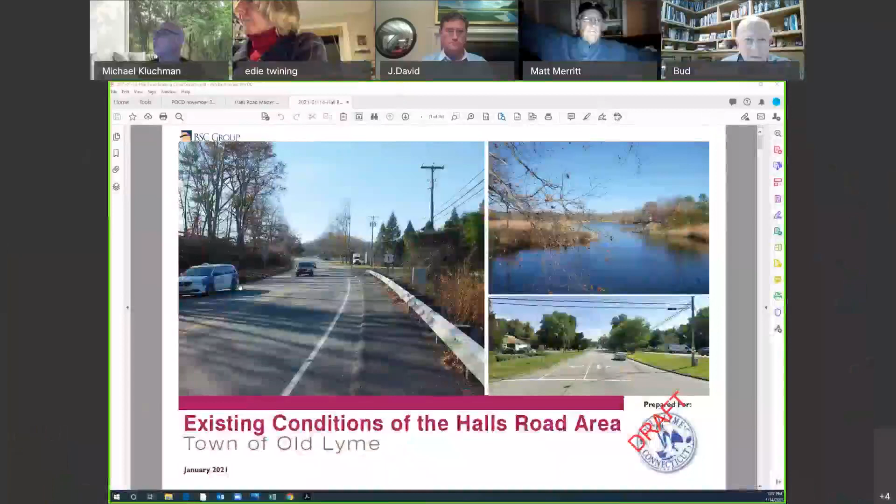Okay, thank you Edie. Let me try to share my screen here. Okay, so hopefully you're seeing three pictures of the corridor. Does everybody see a sort of cover page? Yep, okay great, thank you.

Just all of these platforms are different, so basically you disappeared, but I can see what I'm talking about, so that's good. Again, my name is Michael Kluchman, manager of landscape architecture for BSC Group and project manager for the Halls Road Master Plan. As Edie said, we're basically done with our first phase, which was basically an existing conditions analysis, including a market study.

We're wrapping up a draft on this right now. We still have some edits to make and some feedback for me, but we're close to being done with this deliverable. This will be wrapped into a final report section, but I want to run through this. Some of the stuff will be similar to the last presentation. If anybody has a question, please stop me, and we might want to review some of the things. But let me just run through some material here.

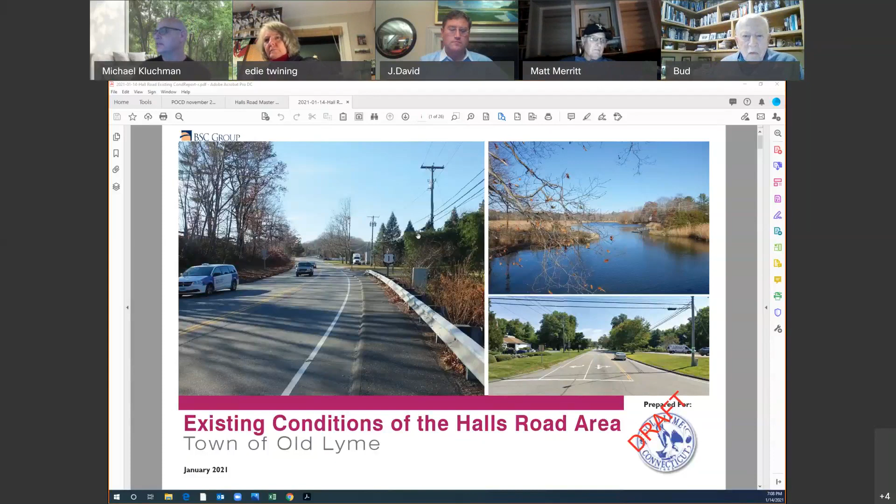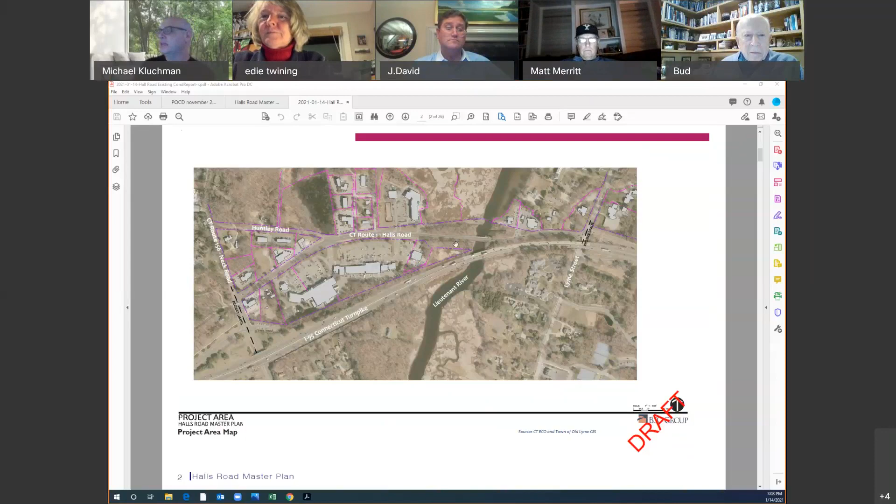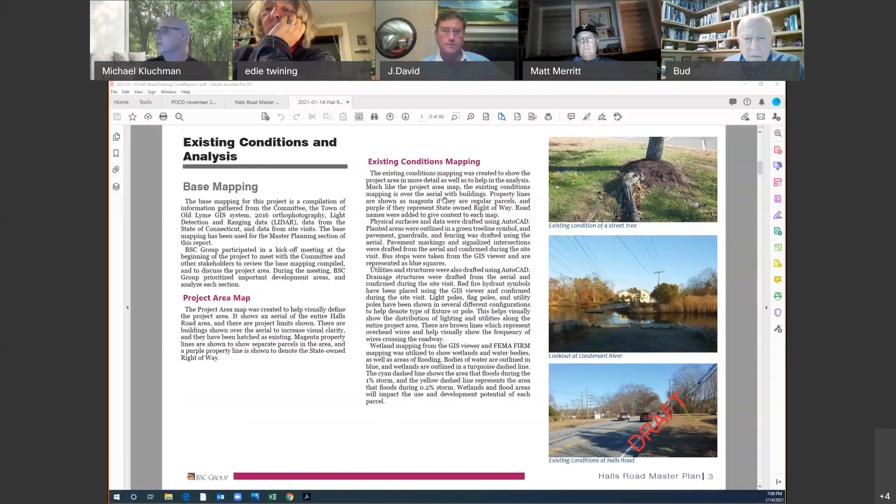So what we have here is our project area from 156 Neck Road over to Lyme Street, along Halls Road, and this is our overall context map that we did as part of our analysis. This is base mapping of conditions, which came from available GIS and state data overlaid with our own field reconnaissance, work and drafting. So there's a lot of information on these plans. We've broken down the corridor into sections as far as the report goes.

Again, when this report is published, you'll be able to read the legend, but I can explain if anybody has questions about what's on here. So we have the private property lines, the state right of way, existing vegetation, the highway elements, guardrails, street lights, utility poles, and things like that.

As we go down, you'll see that where there's wetlands or flood lines, those are also on the plans. We've identified light poles and traffic signals, utilities, fire hydrants, et cetera.

This plan is overlaid with an aerial image, which is also available from the state, geo-referenced to some of the line work and the elevations. We've also pulled out elevational information available from the state, but we've shown that where it's relevant with slopes and other things, so as not to cloud these things too graphically. What I was getting at is that the aerial imagery and the line work is actually fairly accurate for planning purposes, which is why we use this as a base map.

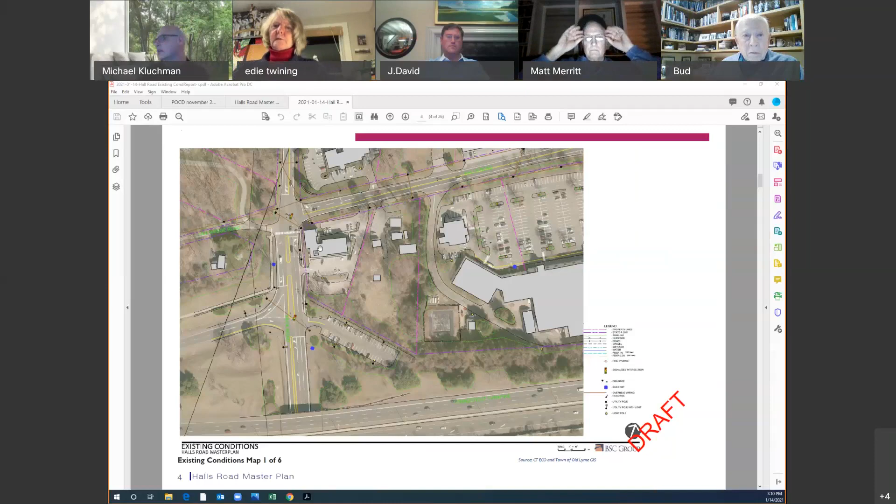So anyway, we're starting at the western end, and we have two windows, one to the south near 95, and then one up picking up Huntley Road.

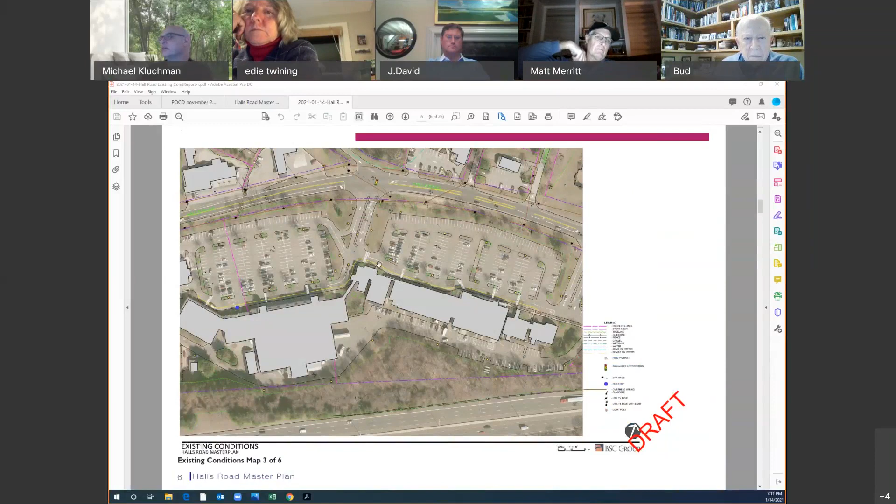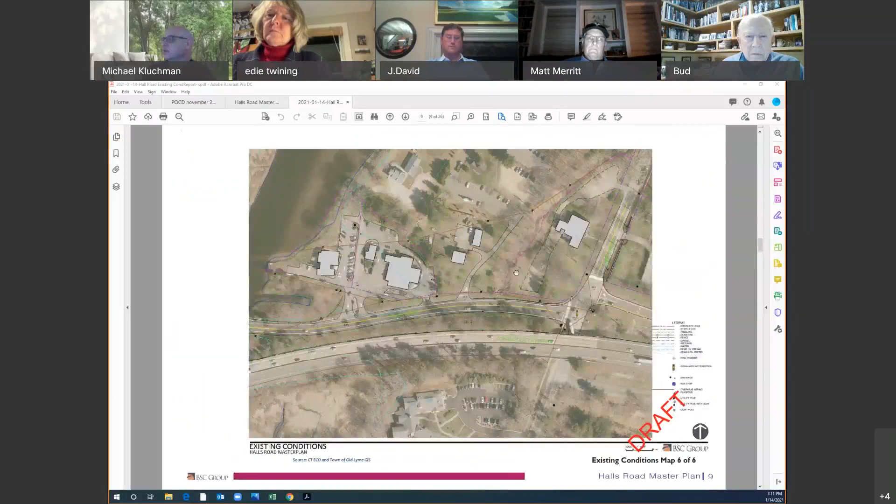We move down the corridor, we pick up the Big Y and shopping center parking lot, and continue down the corridor to where the Dunkin' Donuts is across the street, to the Lieutenant River crossing, where we're starting to see some of the 100 and 500 year flood lines. We can go into detail on this when we start doing our planning work, blowing up areas, since this is very useful information. Finally we get across the river to the Florence Griswold Museum and the art station building at the end of our project area.

Not to read through all the text, but as far as existing conditions, we talked about the public way, the town streets and state-owned highway right of way, and looked at pedestrian facilities within that, including the existing Chamber of Commerce safety walk. We looked at bicycle facilities, or lack thereof, and then focused on describing the roadways in the project, primarily Halls Road, which is Connecticut Route 1, and some background on what that means for the planning process and working with the state on improvements.

One question asked a while ago, and we're working with ConnDOT on a number of projects, one even in town, is whether the highway department will be an obstacle to achieving the goals we've set for a better connected, safer corridor with improvements along the roadway. The answer is no, but if you ask them for one particular thing, like a crosswalk, they do need to know the context.

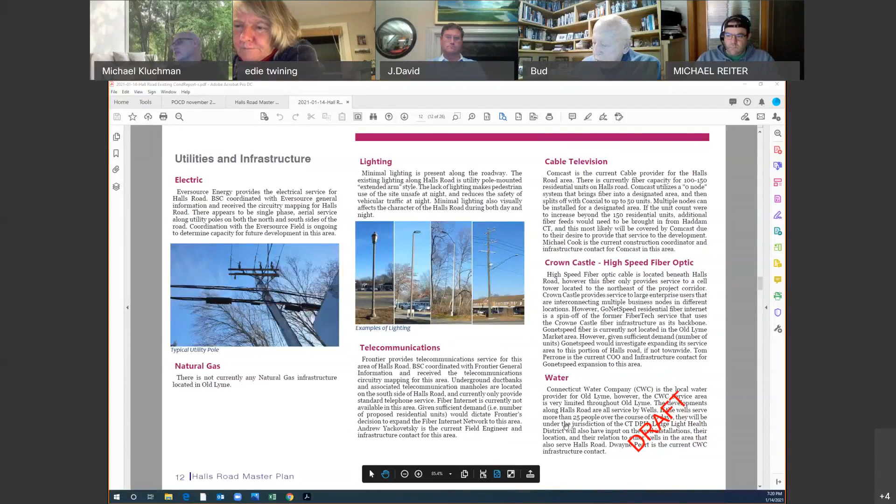Water, just saying the obvious, there's just well water in the area. If you're looking at expanding it, there are standards that are just sort of state tiers. So if a well serves more than 25 people over the course of, I believe, 60 days, they are under the jurisdiction of Connecticut Department of Public Health. So there's just another level of regulation, but it's no big deal - just be aware of that sort of thing, there's thresholds that change who regulates what.

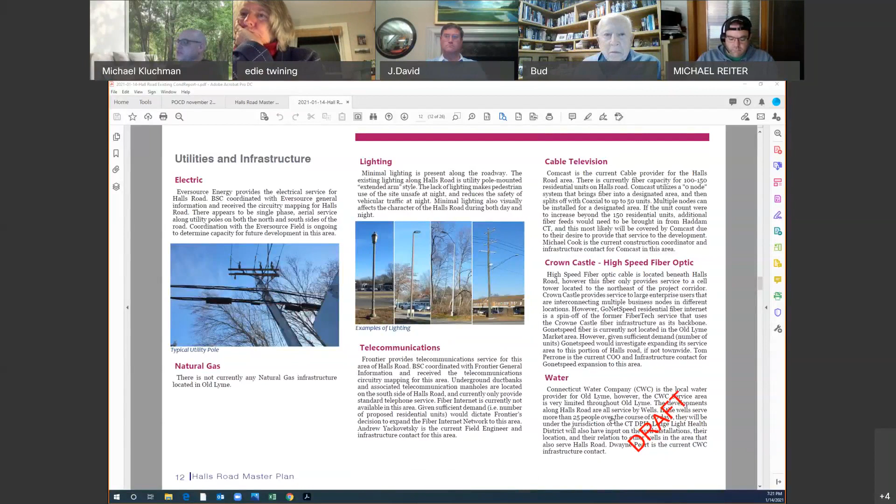The same goes for the sanitary sewer. So right now we know there's no sewer service along the corridor, and the Ledge Light Health District is the jurisdictional body which handles the installation of systems that generate 7,500 gallons or less wastewater per day. That's most likely what you have there. Right now, I think even including the system behind the big Y, it's not residential, so it's not actually that much production.

So our understanding is right now, all of the systems are under the jurisdictional body of Ledge Light. Once we look at possible development scenarios, once you go above that limit I talked about, you start getting into the Department of Environmental Protection, who starts getting their sign-off as well. And then if you went to even a higher level, there's another environment department in the state that oversees it. But I don't think we would be close to that.

And we'll talk about the sewer later, unless anybody has questions, because I think a lot of our planning will hinge on strategies for sewer.

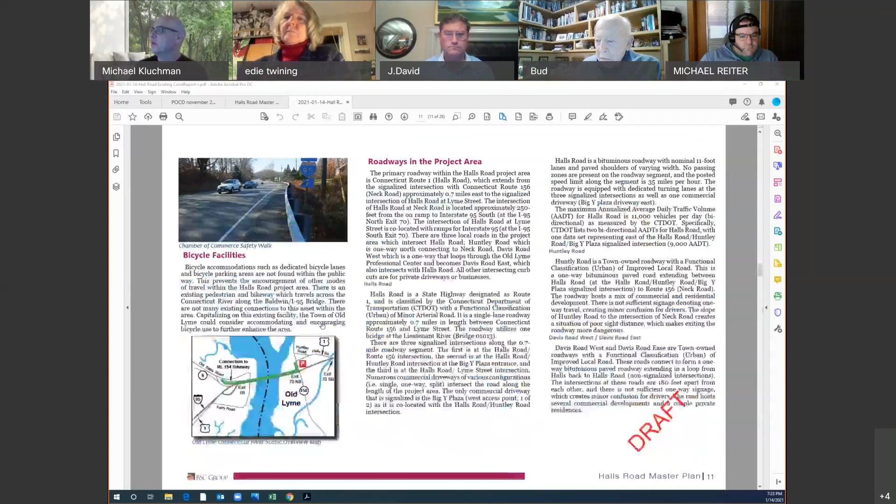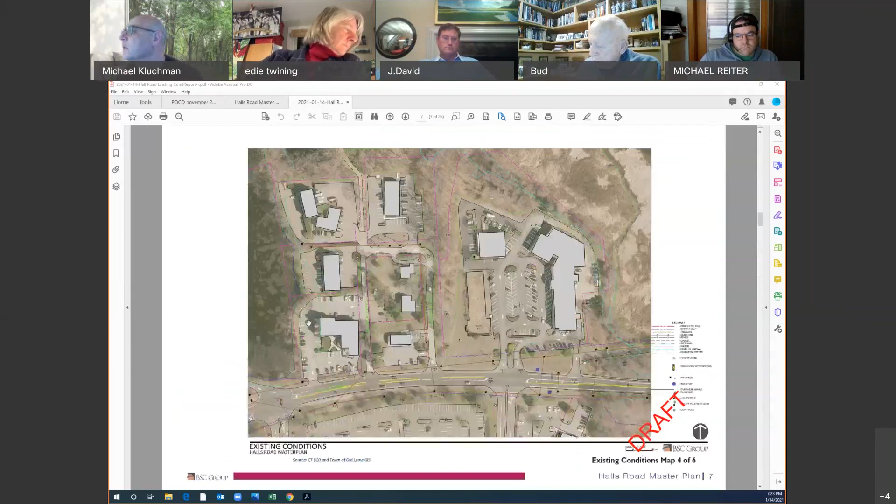Is there any drainage along Halls Road at all? There are some catch basins and drain inlets that we noted on our site walk. I don't know if we picked them up on our base mapping, but yeah, we did - we have actually located drainage structures that we observed on our base mapping. So we have those located on the plan.

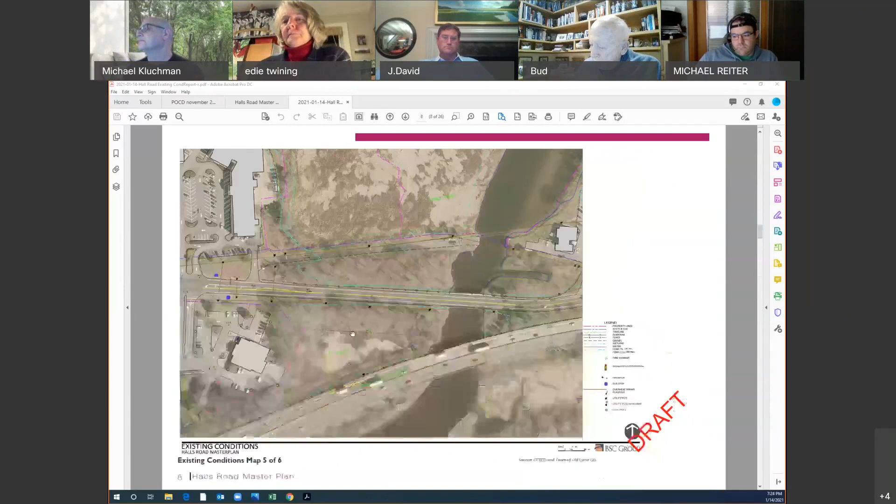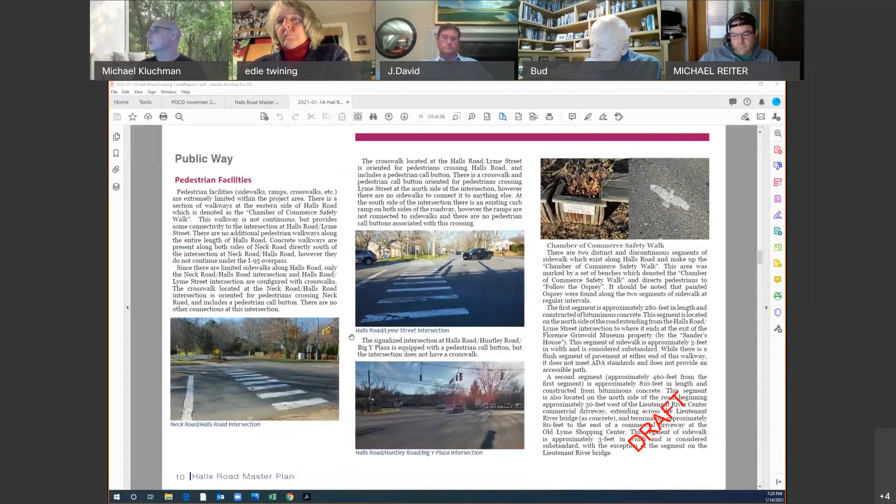So it's just helpful for the master planning process if there's some major drainage infrastructure, which we haven't found, we just want to be aware of it.

So the other piece of this, we've got the roadway and the sidewalks in the corridor and the infrastructure, and we also now have existing architecture.

Not only its position, trying to create more of a village feel with buildings closer to the road and not seeing parking, but the architecture itself - we've taken pictures of buildings along the corridor, and it seems like things are different, but when you look at the photos, it really says a lot. Most of the buildings were developed since the mid-20th century, the 50s on, when this started being developed as a commercial area.

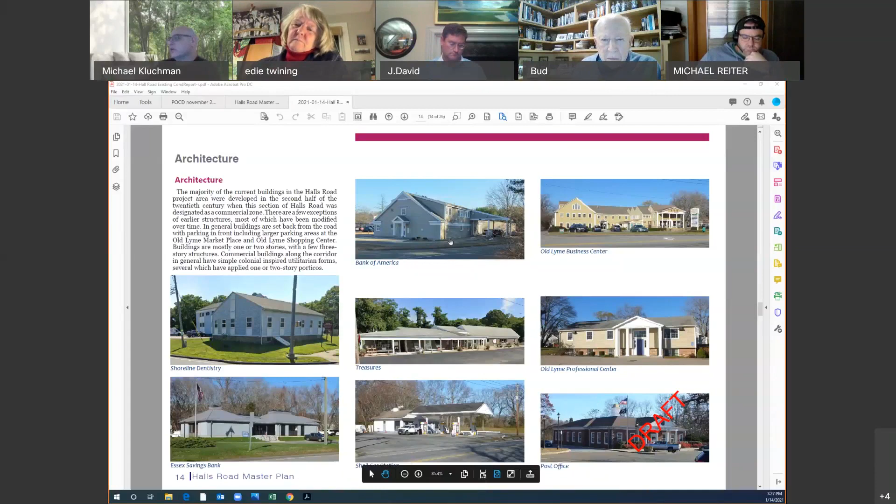And then we're getting into the shopping center, the Big Y Center, where again we have the porticos. We also have this called a colonnade, this wraparound porch, which in itself is actually a nice feature. It suffers from being behind the parking lot.

So without getting ahead of ourselves, when we look at planning options, we'd want to activate this so people would want to walk around the edges. Because right now, I don't think many of you probably start at one end and walk all the way to the other. You may do your shopping at one side and put your groceries in, then maybe drive to the other lot, because there's no reason to walk all the way down there carrying things.

But there's been a lot of effort to make this a pleasant space. Any one of these areas under the porch are nice. I think it's a matter of activating the rest of the site.

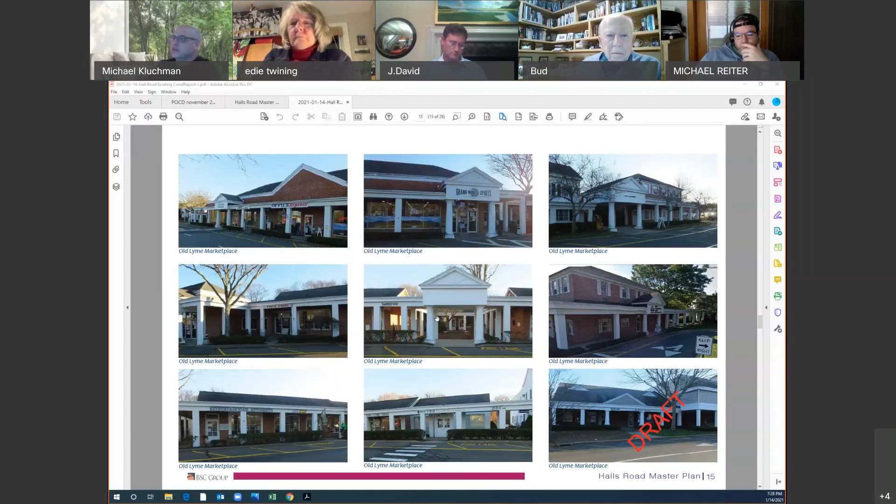And as we go down towards the Old Lyme Shopping Center where the Hideaway is, again, you're getting boxy architecture, not a lot of detail or design to it. Functional, again, we've got more of the porticos going on.

And then as we get to the end, here's our Lyme Art Association, by contrast, a very nicely designed building. So anyway, as we go into design and making suggestions, it doesn't mean there's anything necessarily wrong with what's there now as far as function.

But we would want to talk about what we'd like the character to be. What other buildings in town, what other examples could we bring in and guide development so that we get the character and feel that is a little more human scaled, instead of the larger buildings, that you'd like to see in Old Lyme. We've got all these samples, so I'll just keep going - please stop me.

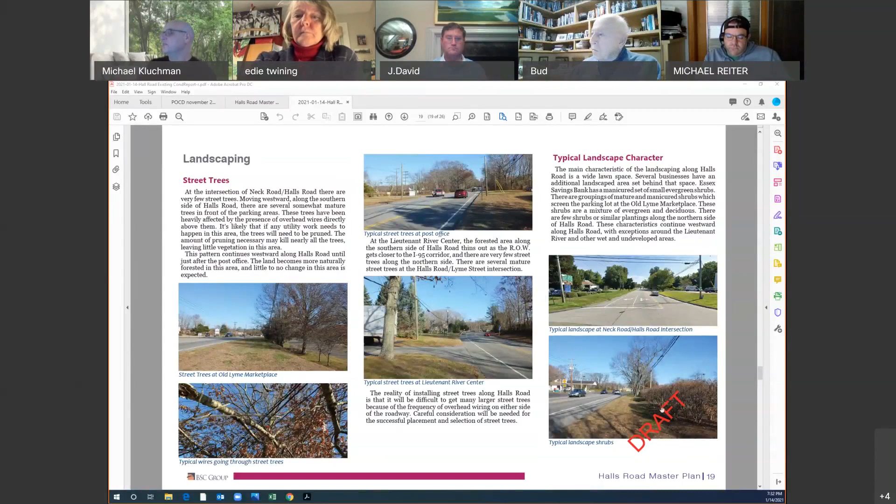We looked at landscape character. Again, we talked mostly about lawn up to the road. There are some examples of shrubs and some other things.

So before I go back to the market conditions, I just don't know if anyone... I think I have an idea what we were talking about. Where should we keep it?

Okay, so at the last meeting, Maura Cochran, who was our real estate expert, went over her market conditions report, so that will be wrapped in here. That's not my personal expertise, but I'll run through it quickly for people who didn't have the privilege of being here last time. Maura looked at the existing market conditions.

She toured the study area, created a database of all the properties, interviewed brokers and people who knew the market in town, researched residential market availability for rents, and also interviewed property owners along the corridor to get feedback. So she had a good basis to look at it.

We'll have her detailed data wrapped into a report, but her key findings, as a repeat, were that market rates for general office and retail do not support new construction. Specialty spaces such as medical offices or banks do. She's projecting that vacancy rates for office and retail are currently under 5%, but based on her interviews and research, she expects the trend will be more vacancy starting in the coming year.

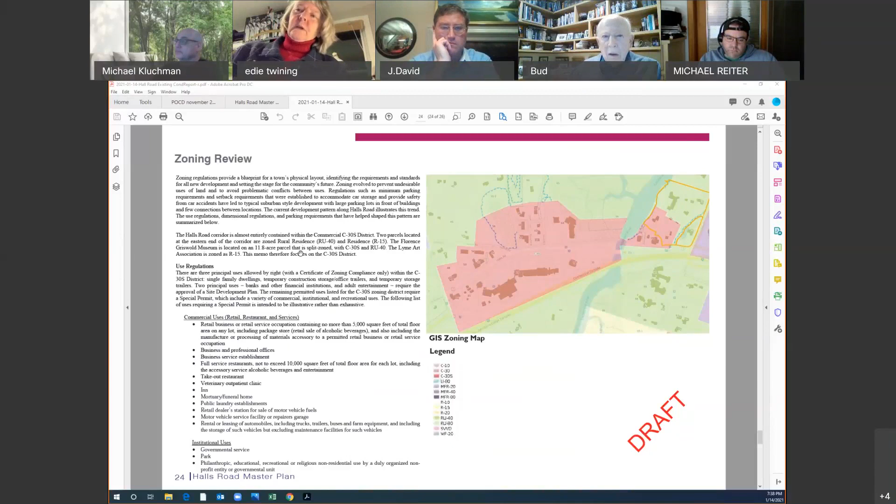So Michael, yeah, I think that this is a great recap of a lot of what we heard last time. And I'm wondering, I know one of the bigger questions on everyone's mind is what you can do to learn about different possibilities for septic systems, and where will we get with that? That's clearly - if there's any kind of mixed use, we obviously need to address the infrastructure for that particular type of question. And I'm just wondering what you guys have figured out or what you're getting to from that point.

Sure, yeah. No, that's good, because we've gotten to this point. We've looked at and gotten a good handle on existing conditions, and we have a basis, a canvas, to start planning. Where we've come to is: we think there's a good demand for housing or mixed use.

We know the limitation right now is going to be septic or sewer. We know that it's tough - it's not ideal conditions for private septic along the corridor. There's either high water table or ledge in many locations.

So it doesn't mean individual systems can't be built, but we think that that will be more limiting than the economics of it. So one thing we're doing is we're persisting.

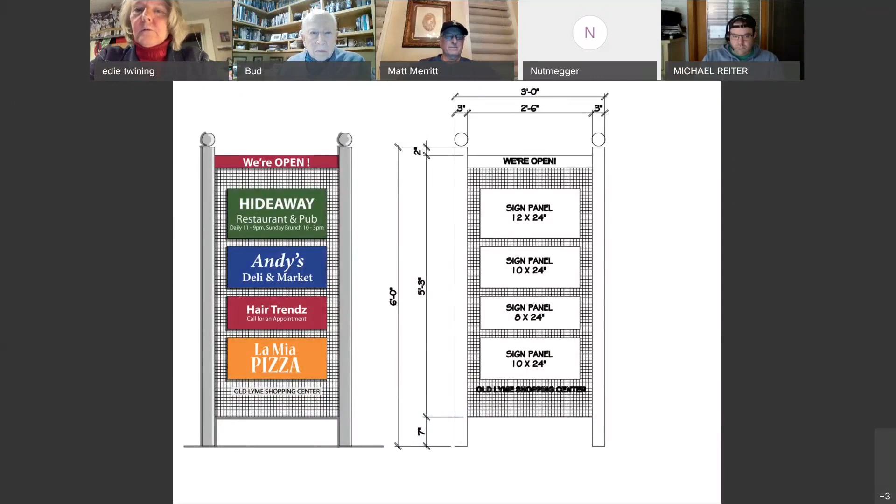So this is just a brief idea. Instead of having all these signs hanging around all over the place, maybe we make a fairly permanent sign that's on the property for the shopping center. This would be a very simple sign, aluminum posts with some signage that the folks that have the businesses would probably pay for. I also thought it might be worthwhile to make a suggestion to the property owner of a replacement for their existing sign that's there today—something that doesn't make the Old Lyme Shopping Center the biggest sign on the list. Right now, this is what we have, and you can barely read anybody's signs on it. So I just thought I would share that with you guys.

Hopefully I did that. You did. Okay. Now I got to figure out how to get out of this. How do I get that out of there?

And Edie, you said the idea is that the business owners would pay for this or the town? Yeah, my suggestion would be to go to these 3 or 4 places and say, look, it's actually illegal to be having these signs up for more than 30 days. They've been up there all year. We don't want to make it hard on you, but that's why I'm asking a sign maker to give me a price on this idea, so we could find out what's possible and whether people would want to pay for something like this.

Yeah, and it's typically the town that doesn't pay for signage. They regulate the size and all that stuff. There's a strict sign regulation in the zoning. They can't be backlit, although they can be frontlit. So having a sign lit from the ground, like a spotlight, is permissible, but you can't have a neon backlit sign, and there are limits on the square footage. But you're right, it is the tenant who pays for the signage. I think it's a great idea, Edie.